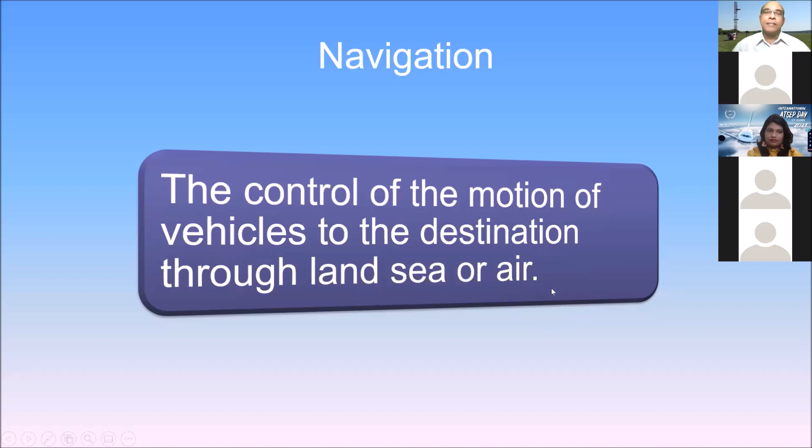So when we navigate, this is what it means: the control of the motion of vehicles to the destination through land, sea or air. Our focus is air navigation, but navigation is a more generic term which applies to land and sea as well. This is the definition.

When it comes to air navigation, we have 3 main phases: first the takeoff, then en route navigation, and then the landing phase. Altogether, it starts with flight planning, then pushback, taxiing, takeoff, then domestic cruise or oceanic cruise, then descent, final approach, and landing. So in order to support these different phases of flight, we have to establish support systems, mostly electronic systems, to support each of these phases.

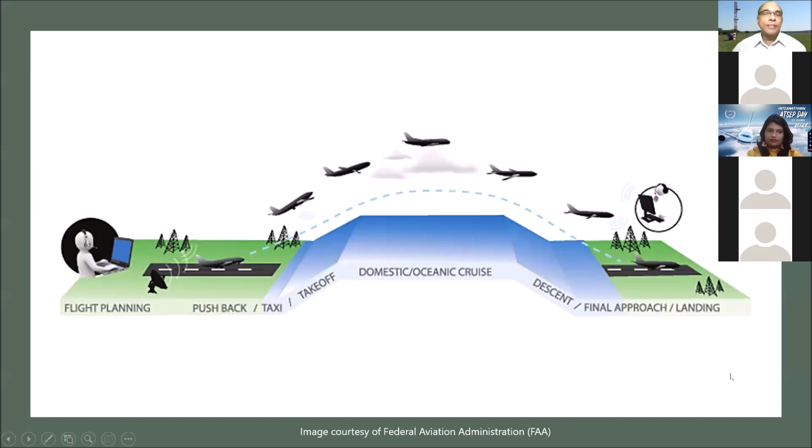This is a safety critical industry, and therefore in each phase when you introduce technology, it has to be well proven and tested so that safety levels are very high. That is why we need specially trained people to absorb these technologies to the local surroundings, and not only absorption, but installing, commissioning, maintaining, and when faults develop, doing repairs - that is preventive as well as corrective maintenance. All that lies on the shoulders of ATSEP staff.

So coming back to you, if I ask, how do I know where I am? Now you know you are in your room, or you know what is in your surroundings. So actually, to locate yourself, your brain will look around for landmarks. Your brain will be tracing the landmarks, then calculate your relative position to each landmark, and then you are located. We call it a position fix, and you do it every moment in your day - your brain continuously does this.

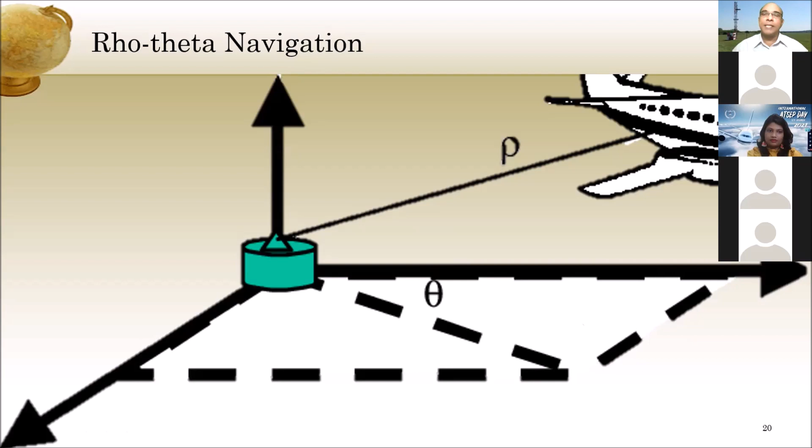You can see when there is an aircraft, this distance from a fixed location close to an airport, and this angle, called the bearing with respect to north, can be given to the pilot so that he can find where he is. He can fix the position, for which ATSEP install this kind of equipment.

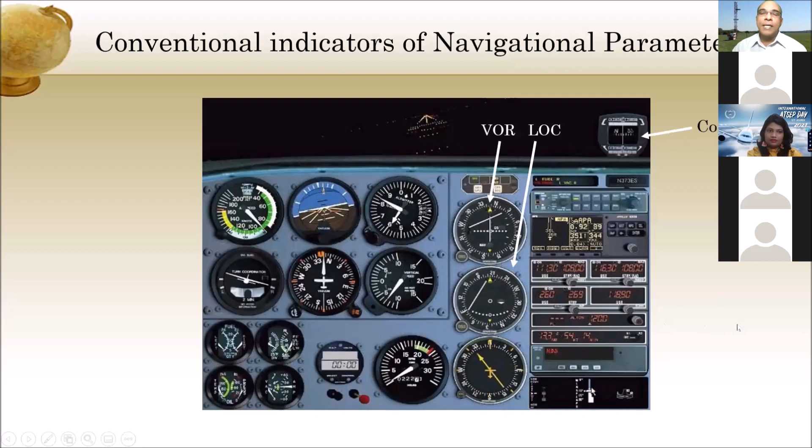So in a primitive, old-fashioned display in the cockpit, you have various equipment where this is the VOR receiver, then localizer, and so many navigational aids, electronic navigational aids to support the pilot.

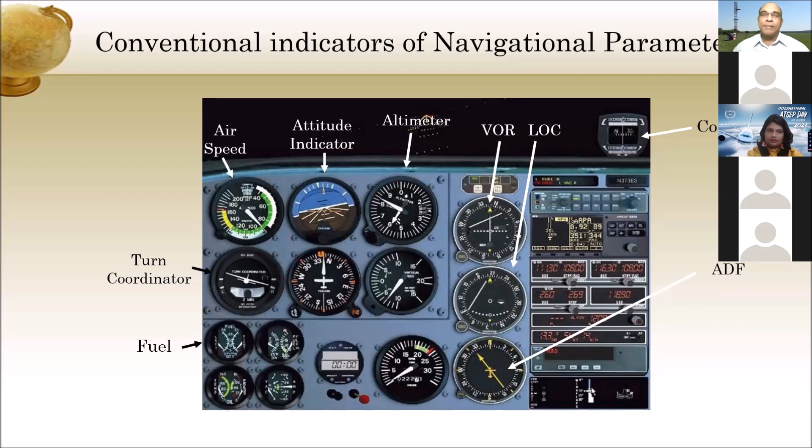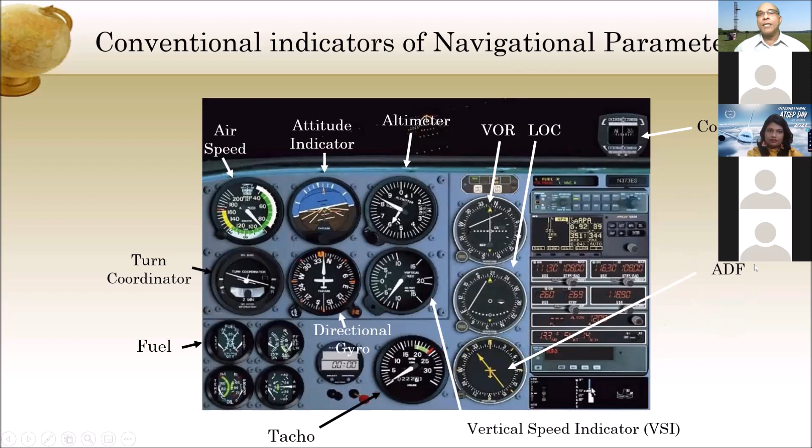Well, of course, this is very old-fashioned, what I just showed you. This is more clear, but nowadays the displays are very different. You find them laid down in a small aircraft like this. Now, even if there are no landmarks around in the en route navigation, the pilot can use these electronic support systems to find his way.

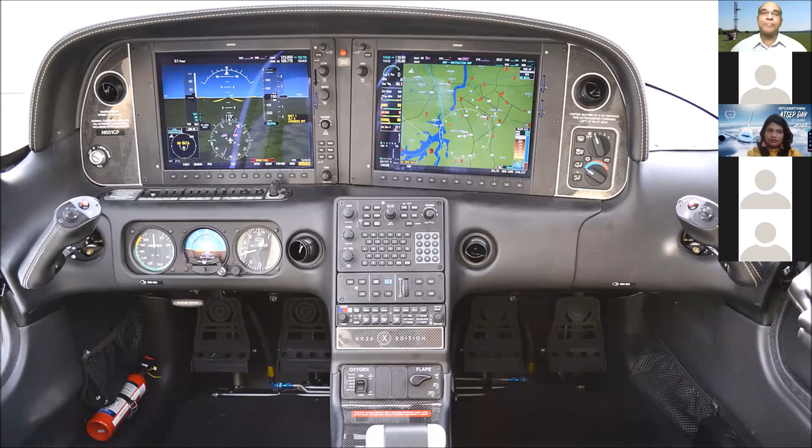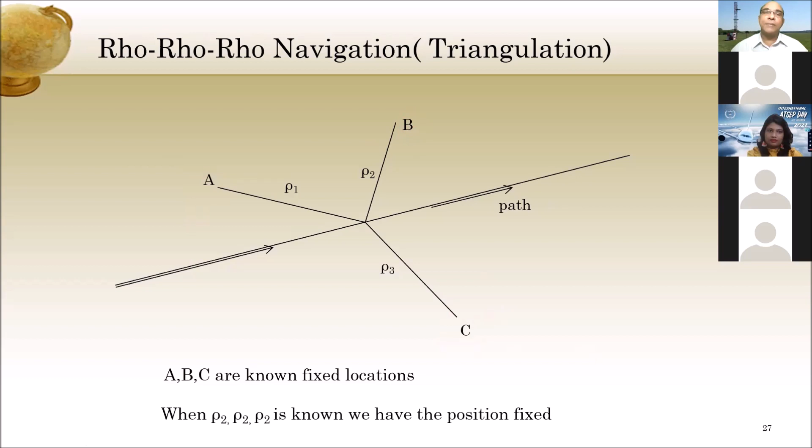So in each place, you can keep fixing your position with respect to rho 1, rho 2, rho 3, relative to the A, B, C stations. These stations could be on the ground, or they could be satellites. If they are on the ground, there were systems like the long-range navigation system called LORAN some time back. Nowadays, A, B, C are actually satellites, because satellite positions are known at a given time. You can calculate rho 1, rho 2, rho 3 to find where you are.

Mathematically, this is how you find yourself with respect to rho 1, rho 2, rho 3. We need a fourth one because of the clock errors. When you have a fourth satellite, we are ready to do a position fix. It could be in the air, on the sea, or on land as well. So we can write these triangulation equations, and solving these 4 equations happens within the GPS receiver equipment. Since your phone also has GPS, this is being done even in your phone.

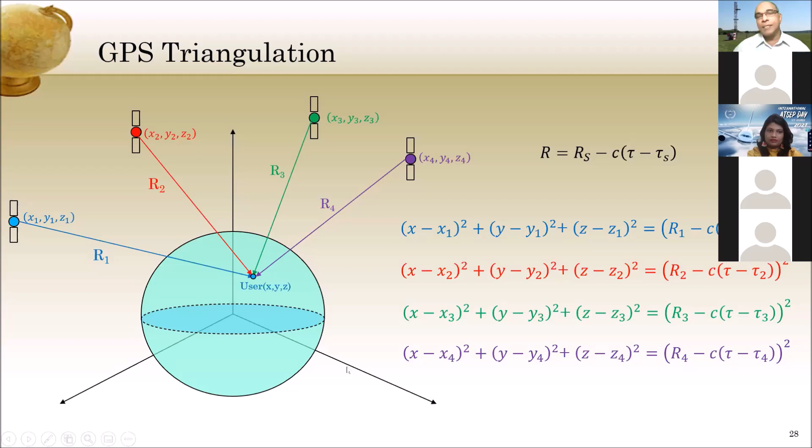But what is different between the GPS equipment in your phone and the one in the aircraft is the precision. The clocks have to be more precise and the calculations have to be more precise. That is the difference. Otherwise, the triangulation equations are the same.

This is a typical GPS receiver block diagram, with the GPS antenna. GPS uses a technology called CDMA, code division multiple access. So there are multiple receivers; this is called the rake receiver principle. Each of these receivers can lock onto one satellite, and therefore it can lock onto n satellites in parallel. The more satellites you have access to, the more precise the position fixing will be in the GPS.

Okay, so that's about the en route support. The ATSEP support the position fix and the navigation using these 2 main techniques, rho-theta navigation or rho navigation. In fact, you can have both, rho-theta and rho together, so that if one fails, you have another. A kind of fail-safe operation could be achieved.

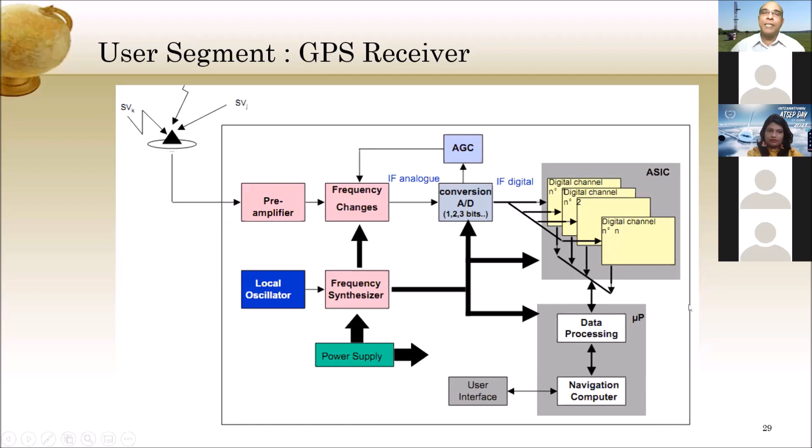And the other part is the landing. What I discussed so far is the level flight, the en route navigation, and the more critical one is the landing, for which you have different kinds of support. If everything is clear, visual landing is possible for the pilot. But in adverse weather or at night, you need a lot of support given by ATSEP. You have systems called instrument landing system, ILS. There was one called microwave landing system. And now new ones are coming, called ground-based augmentation systems, which I will quickly go through.

In the ILS, we have these kinds of equipment by these names: localizer, glide slope, markers. I'm giving you the plan view looking from the sky, assuming this is a runway strip. Then you install one equipment called localizer here. This is the antenna, this is the equipment. And another one called glide slope, and the antenna.

And markers: inner marker, middle marker, and outer marker. Nowadays, the inner marker is not compulsory, not needed. This is the extended runway center line. At given distances, you install these markers. So these three subsystems put together we call the instrument landing system, and that gives landing support to the pilot.

And also you have the visual support called precision approach path indicators, sometimes called visual approach slope indicators. They're also there. In the vertical plane view, if this is a runway, the markers are like this. Markers radiate upwards certain beams like this. And when the aircraft is crossing these beams, the pilot gets a proximity indication of how close he is to the runway threshold.

So the flight approach path will be typically around 3 degrees to make it convenient to the passengers. And proximity indication is given by this received signal during this period, then during this time, then during this time. Since the time is limited, in the presentation I have included the videos if you want to get more details about this.

Okay. So he will hear certain tones when he crosses these markers, and also he will have some lights, so visual indication as well. And those are markers. If we come to the localizer equipment, the localizer is an antenna array and equipment installed here so that it will help the pilot to align the aircraft along the extended runway center line, even at night, and even if there is no visibility of the runway.

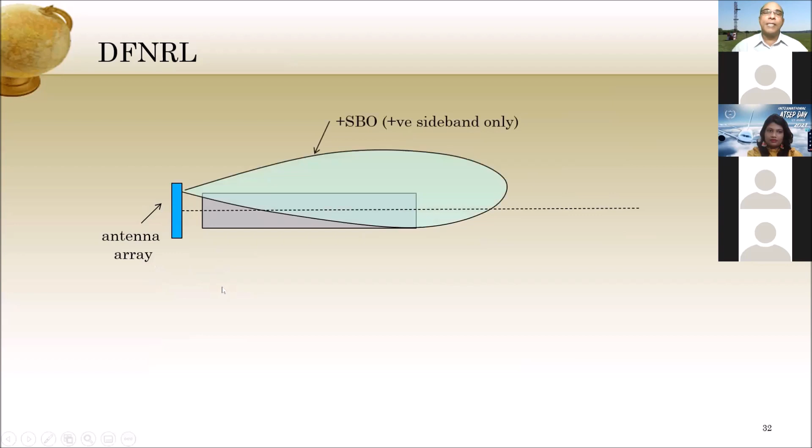So it radiates beams like this with different names like sideband only, etc. Technical names I will avoid. And there are 3 main beams. In fact, there are 6. There are another 3 called clearance beams, but I will show you only the 3 main beams. These signals are picked up far away by the pilot, and using these signals, he gets an indication of how offset his approach is with respect to this runway center line.

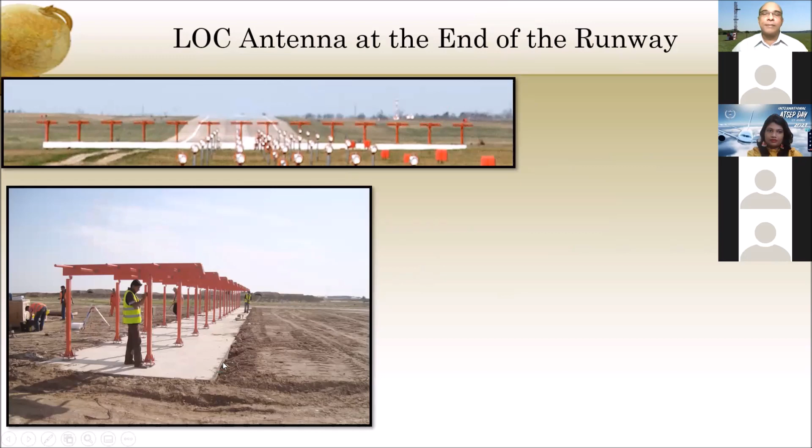Let me show you the localizer antenna, which is at the end of the runway. So these are the antennas. It's an array of antennas driven by RF signals. This is another installation of a localizer antenna. Another installation of a localizer antenna. So this is at one end of the runway, and if you support landing from both ends, you will install 2 localizers, one at each end.

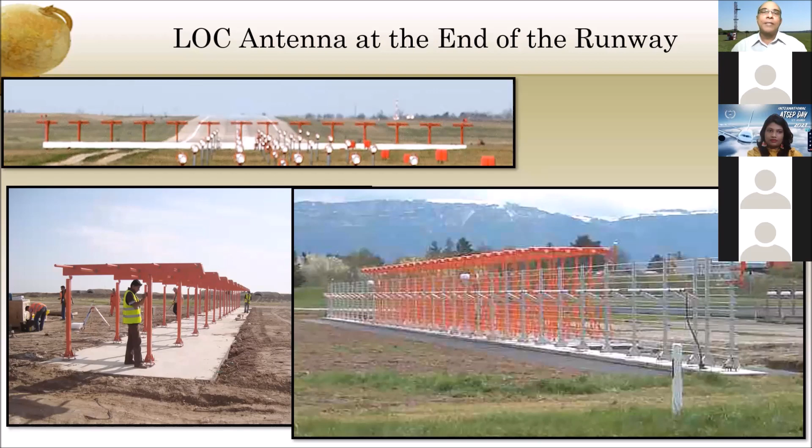Okay. So in clear sky, first the pilot can see the runway, and problems occur when it is cloudy or when there is a lot of fog or mist or heavy rain, so that the cloud base has come down and the clearance between the ground and the cloud base is very small. The visibility becomes very poor, and there is a lot of risk during that phase, especially in bad weather and night. At night, of course, you will have this visual support also with the lighting.

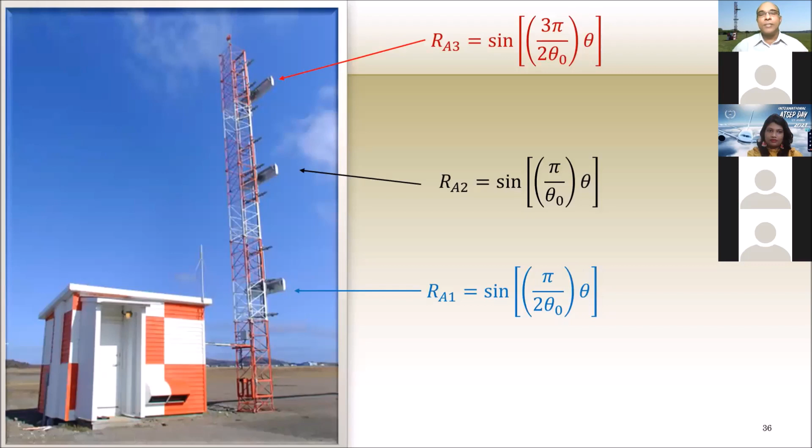Shelter here. Usually 3 antennas, we call it M array, and that is installed by the side of the runway. So this is the runway. When you go along the runway, you can see the glide slope by the side of it. Using this kind of an antenna array, it radiates certain signals. These are the mathematical equations of those signals, and they combine in the sky to form this kind of radiation pattern. You have the glide angle, which is about 3 degrees, with one signal dominating below that and another signal dominating above that.

And therefore, the pilot will get a fly up indication if he is too low, and a fly down indication if he is above this line. So when he has received the signal, he will continuously get fly up, fly down corrections from this ground equipment. And the accuracy of this equipment is very, very important because a small error in the landing could be fatal. The reason being that at certain heights, the pilot may not have enough thrust to climb the plane again. Therefore, these are very precise equipment.

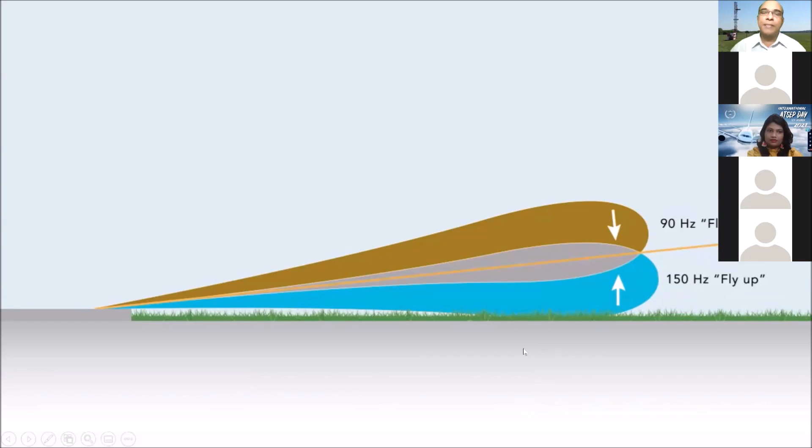Therefore, you install these ground-based augmentation systems, especially close to the airports, so that the GPS system will have enough accuracy to support the landing. User means the pilot can apply these corrections, which happens automatically within the GPS receiver. Then accuracy depends on the distance between the user and this differential GPS equipment.

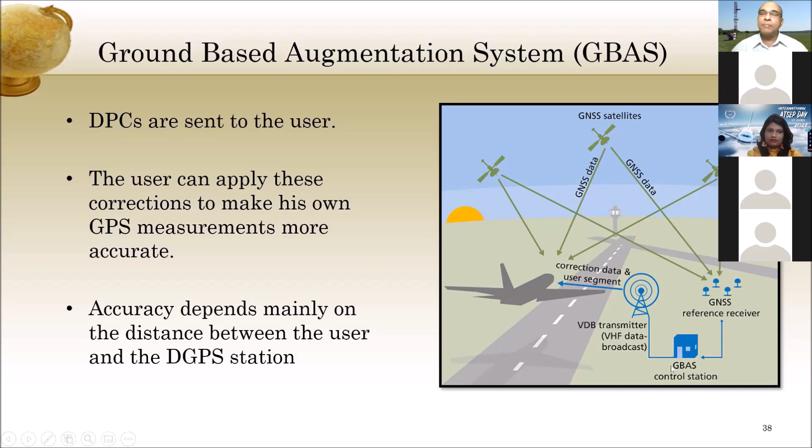So these systems are being installed worldwide now. ILS is a very old system. Actually, it has been in use for a very long time now. And this system is supposed to take over from the ILS in the future.

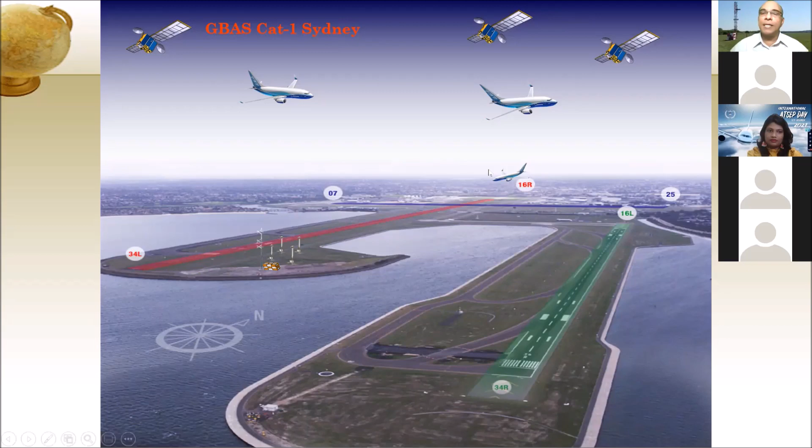And that is ideal for detecting the position of the aircraft by the ground stations. And you have something similar to the eye, you can see. This is the sensor, equivalent to the retina. And this is the focusing lens, which first radiates a pulse and then catches the return echo into this receiver, and through these cables it's taken down. In the eye, it's taken to the brain. Same way, it is taken down to a receiver and the brain. The brain is the radar processor.

You can see how the technology has been adapted from biology, but this is not as superior as a biological sensor, but it can see through. That is the main advantage. And it can see very far as well. You can see hundreds of kilometers.

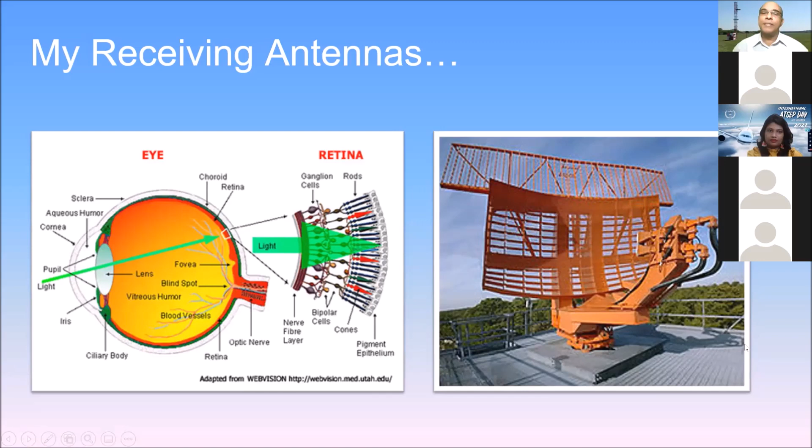And you have two kinds of surveillance equipment. This is primary radar, and this one is called secondary radar. Secondary radar can communicate with an equipment installed in the cockpit, and so the two equipment will coordinate. But primary radar does not need any coordination from any equipment from the cockpit, and primary radar on its own can detect where the aircraft is in the sky and fix its position.

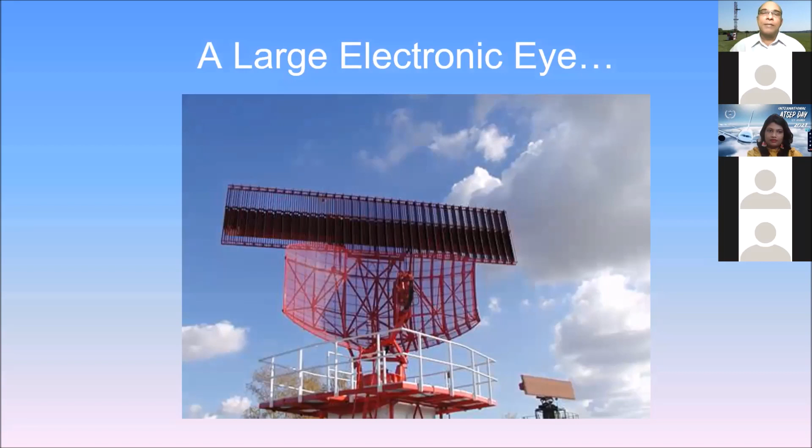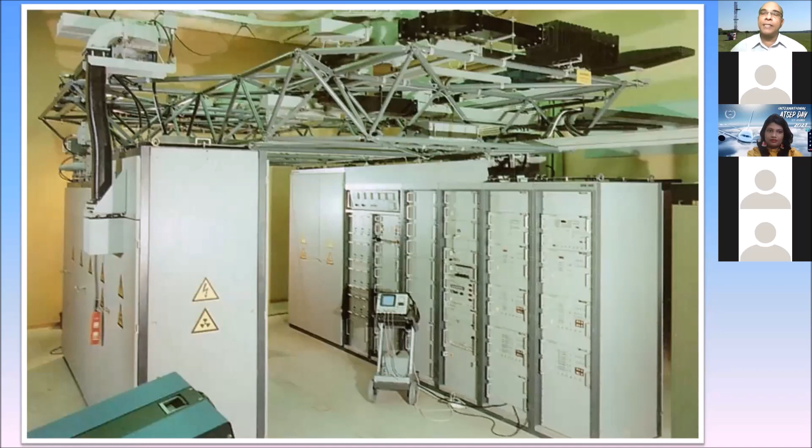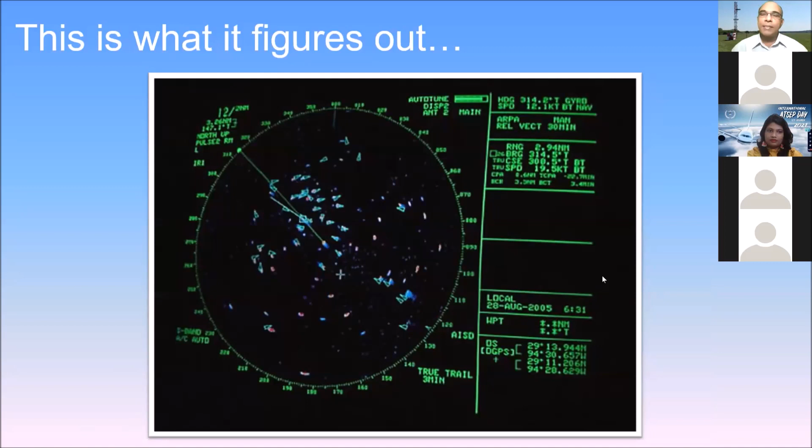So what is processed by the radar processor may appear on screen like this. Each aircraft is appearing like a blip. Of course, a lot of processing is needed to remove the ground clutter and cloud clutter from the radar screen. Finally, you can get it up to this level. But for the aircraft to maneuver properly, you need the support of a human brain. And therefore, this is given to the air traffic controllers, and their brains will support this decision making. The air traffic controller and the pilot can talk to each other and make decisions about the maneuvers.

So you can see these different blips, they are aircraft, and their history is given here. And of course, their future maneuvers can also be predicted by the radar brain, the radar processor. And that is the basic radar.

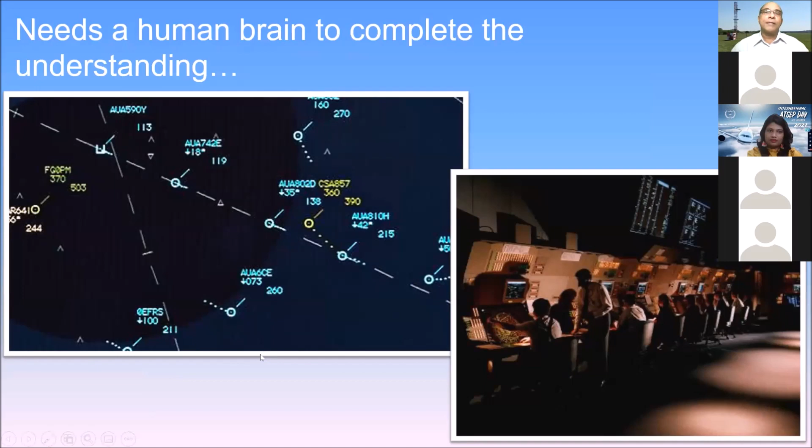In the secondary surveillance radar, you transmit to the cockpit equipment, not the pilot, and interrogate the cockpit equipment, asking questions like, who are you? What is your altitude? Then the equipment will automatically reply. You don't need the pilot to intervene there. The equipment will automatically identify, this is my code and this is my altitude. That kind of information will come to the ground, and that's very useful for the air traffic controllers.

It helps aircraft to automatically exchange data with ATC using a data link without pilot intervention. So that makes the job of the pilot easier. It can transmit the aircraft position and the flight plan during oceanic crossings, and you may use data links such as satellite links or HF data links for that transmission. This is ADS-A mode.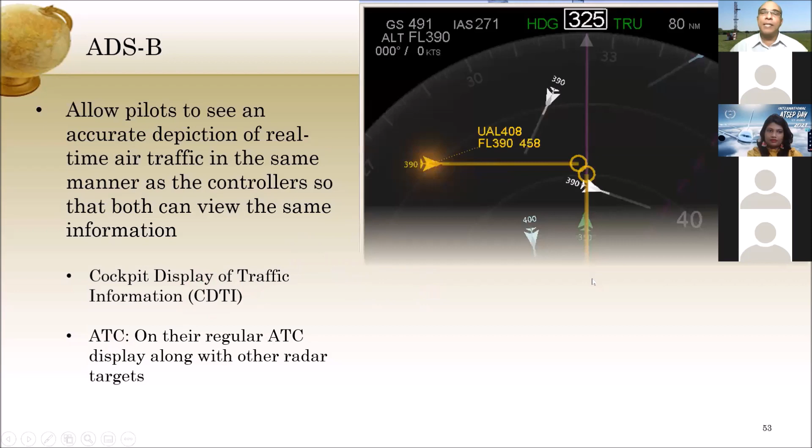ATC will see the information on their regular ATC display, which is normally much larger, and the pilot can see a view like this: what are the aircraft around, with their identities. So it's very easy because both pilot as well as air traffic controllers see similar kind of information, and the understanding will be much better when they talk to each other.

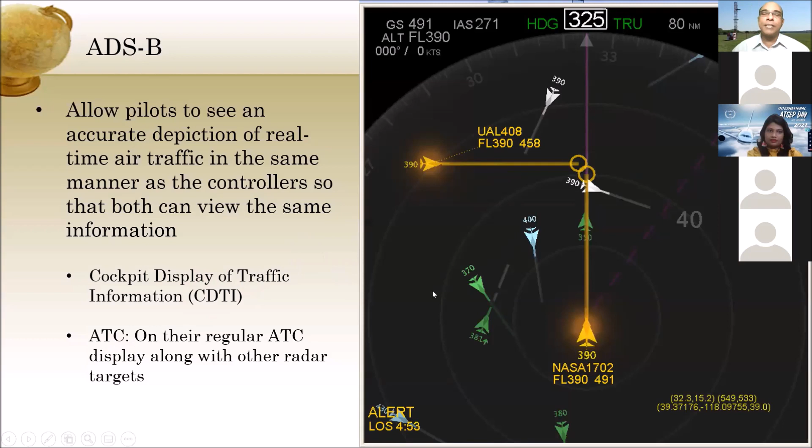Then this ADS broadcast unit will broadcast the GPS position via a digital data link along with the other data like airspeed, altitude, whether the aircraft is turning, climbing, descending, all that information could be transmitted. So anyone with the ADS-B equipment, these ADS-B equipments are very small and lightweight, anyone can receive and view it.

It works at all altitudes, even on the ground it works, so that you can even monitor the traffic on the taxiways, monitor runways. So monitoring has become much easier now. It can also detect any conflict in the flight plans. Resolution could be pushed there. Photos of ADS-B equipment, and it's becoming very, very popular now.

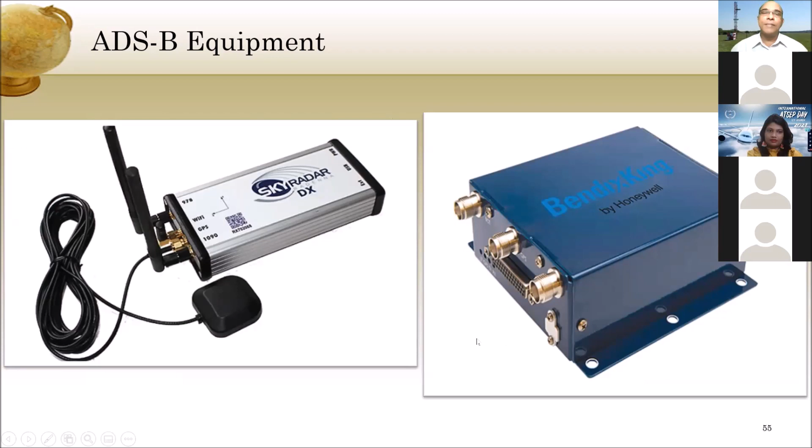There are frequencies 978 megahertz and 1090, and 1090 has been adopted as international standard. We call it ES, extended squitter transponder.

Well, you can use these links to check, like now ADS-B signals you can receive on your computer through internet and receive information about places of each aircraft. Let me see whether this link will work. If it comes up, I'll share with you. It's available to the public.

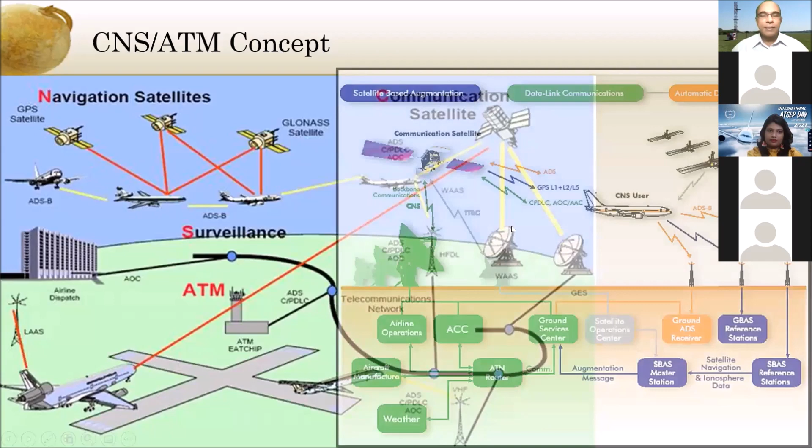You can see two kinds of communications supporting each other during communication between pilot and ATC. A more summarized, less cluttered figure here shows the CNS user getting support like this, and he can relate position calculations to the ground-based ADS receivers and GBAS stations, which are all networked now. All this information can be shared very quickly, so communication has improved drastically with data communication links established between cockpit and the air traffic controller.

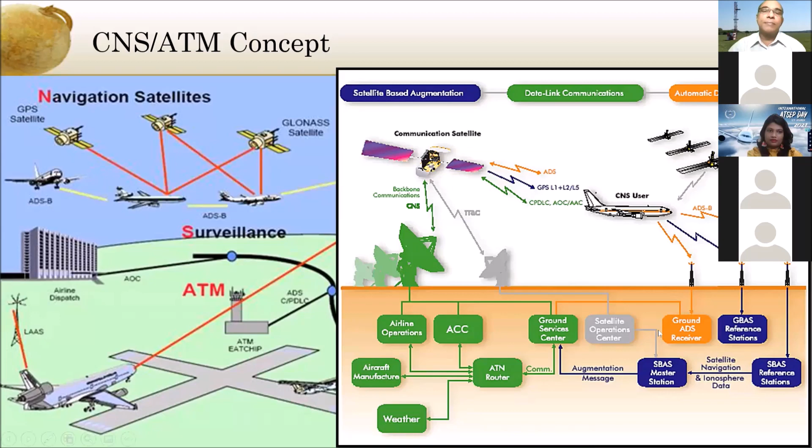And this is the way it will appear now. You have the ATM, and also this flight data processing system, with flight data being processed and exchanged through these local ground communication networks.

Air traffic management means putting all these inputs together. What are the different inputs? You will be getting inputs from each radar. Supposing there are 2-3 radars, each will detect a certain portion of the sky, and some aircraft will be detected by more than one radar. All that information has to come to the ATM, Air Traffic Management System.

Plus the flight data will also be received, plus the data link communications will be received, and all of them will have to be tallied and verified. Once the data is verified, it will be put onto the display. Depending on the amount of validity, you can change the color or the icons, so controllers will easily see validated information, less validated information, and unvalidated information separately.

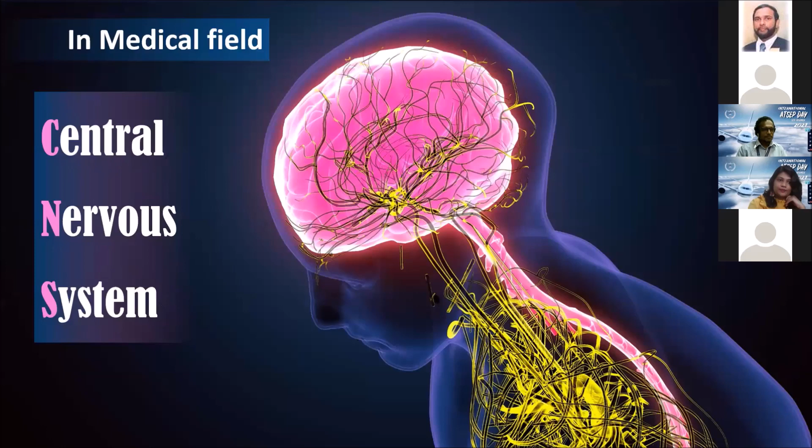And before I reach you on the subject of ATSEP, I'd like to brief you on related terms first. Flight information region: each country has its own airspace, as you have your own residential boundaries. CNS ATM in aviation - I'll explain this acronym from different contexts. In the medical world, CNS is the acronym for Central Nervous System, which is vital for sustaining life.

And in a sense, it's the same in the aviation world. Today, with thousands of aircraft aloft at any one time, communication, navigation, surveillance systems - called CNS systems, as described by Engineer Samarasinghe in previous sessions - play key functions in providing the required infrastructure for air traffic management, ATM. That is to improve flight safety while more efficiently utilizing available airspace. Maintaining clear communication for ground-to-air or air-to-ground operations, maintaining accurate navigation systems especially for homing, and maintaining precise surveillance systems for locating aircraft have long been important for safe, efficient flying. So you might understand how important CNS service combination is required for air traffic management, for safe flying seamlessly across boundaries and terrains.

Or you might understand how unsafe flying would be in the absence of CNS platforms. Air traffic safety: ever-growing aircraft movements are continuously limiting the capacity of airspaces, which are congested day by day. This has been a key challenge faced by global aviation industry stakeholders, since skies are becoming more crowded and communication, navigation, and surveillance become a limiting factor for air traffic management. It is inevitable for safety risks, and therefore efficient use of airspace, despite catering to growing demands, has to be addressed at any cost.

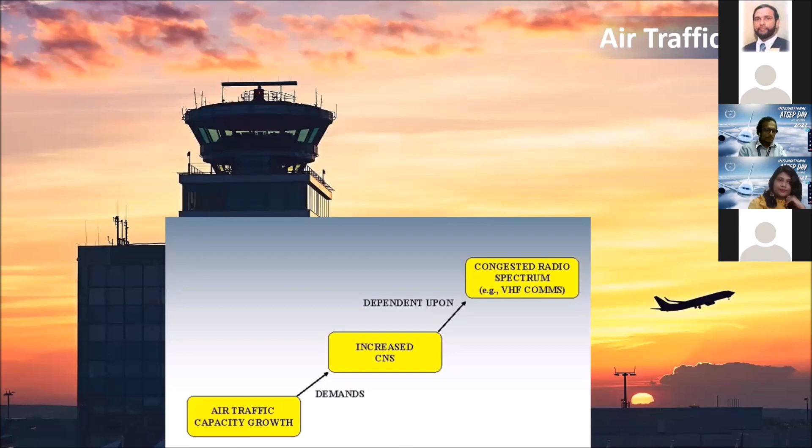Understandably, this challenge can only be met with the continuous evolution and development of CNS ATM system technologies. Managing and upgrading CNS ATM systems in a timely and precise manner enables aircraft operators and air traffic controllers to meet their planned times of arrival and departure, or adhere to their preferred flight profiles with minimum constraints, without compromising other possible safety risks.

Now time to come to the key topic: ATSEP and their role. Air navigation systems have been implemented and are operational globally, going beyond geographical boundaries. So the role of CNS ATM technical expertise has been highlighted under common technical categories and the acronym ATSEP, Air Traffic Safety Electronic Personnel, by the International Civil Aviation Organization.

So ATSEP, Air Traffic Safety Electronic Personnel, is described as a unique technical and engineering professional, proven competent in planning, installation, calibrations, operations, and maintenance of air traffic safety electronic systems. This includes communication, navigation, surveillance, and air traffic management systems, in other words CNS ATM systems - as described by Engineer Samarasinghe previously. So simply, ATSEPs are personnel who install and maintain electronic safety systems for air traffic management.

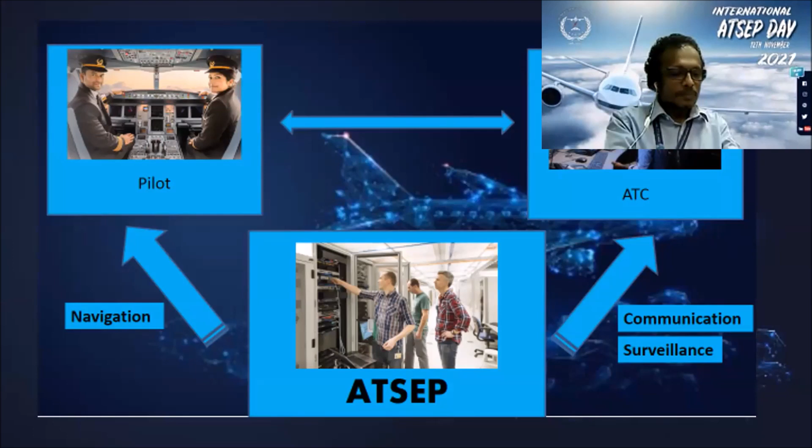Regulatory requirement for competency and skills building for ATSEPs. The effective performance of air traffic management depends on competent and qualified air traffic management professionals. So ATSEPs have a shared understanding in terms of performance when considering the growing complexity and interconnectedness of the systems involved.

Considering the role that ATSEP play delivering safety and their place in the safety chain in aviation, and the growing complexities of air traffic systems, there is a need to minimize the risks that exist with technical systems. Therefore, ICAO has developed several manuals and guidance documents to support skill development via competency-based training and assessments. This is also standardized to bring ATSEPs all around the world to a uniform global level and rate of competency and skills with licensing. This has been focused to minimize various training standards as implemented by individual states.

Controller-pilot and system-to-system interfaces evolved. The air traffic safety electronic personnel manage the entire backbone functioning of the CNS ATM engineering infrastructures in compliance with International Civil Aviation Organization standards and their recommended practices, in a silent, behind-the-screen role.

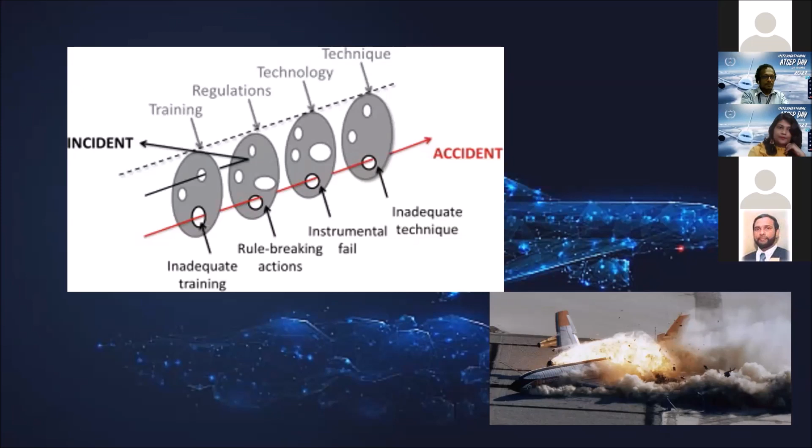In conclusion, finally, I must thank the Air Traffic Engineering Officers Association Sri Lanka, which is the only ATSEP association and representative of Sri Lanka to the International Federation of Air Traffic Safety Electronics Associations, for this wonderful effort in organizing this knowledge sharing event in a meaningful way to celebrate the International ATSEP Day.

The Air Traffic Engineering Officers Association Sri Lanka has shown their professionalism and commitment to aviation, especially in supporting the Next Generation Aviation Professionals, which was an initiative launched by the International Civil Aviation Organization. This is also to promote youngsters to become qualified and competent aviation professionals to maintain future international aviation.

Finally, I wish to remind ATSEP professionals, ranging from air traffic safety electronic engineering officers to engineers, senior engineers and heads of divisions, those who are in and out of service, of their invaluable contribution and services to aviation. Thank you.

Thank you, Mr. Priyantha. So without any delay, let's go for the Q&A session. Mr. Kithsiri, Mr. Maddumabandara, and Mr. Priyantha will join with you. I can see some questions. Shall we look at them one by one?